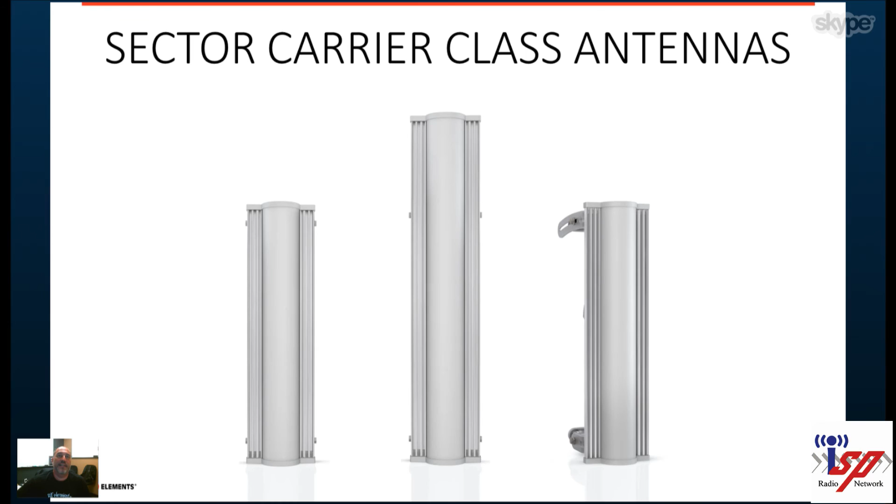So the first product line that I'd like to talk about is our sector carrier class antennas. This is a traditional type sector. It's been on the market close to 3 years, maybe a little bit more. And they're different than what's out there right now, and we'll go into the benefits. Sector carrier class antennas are designed for cluster deployments, where co-location is important, where you want to be able to isolate your co-located antennas.

They also provide excellent horizontal and vertical beam performance, and it's very lightweight aluminum construction. So from the tower climber's perspective, a lighter antenna is a better antenna, right?

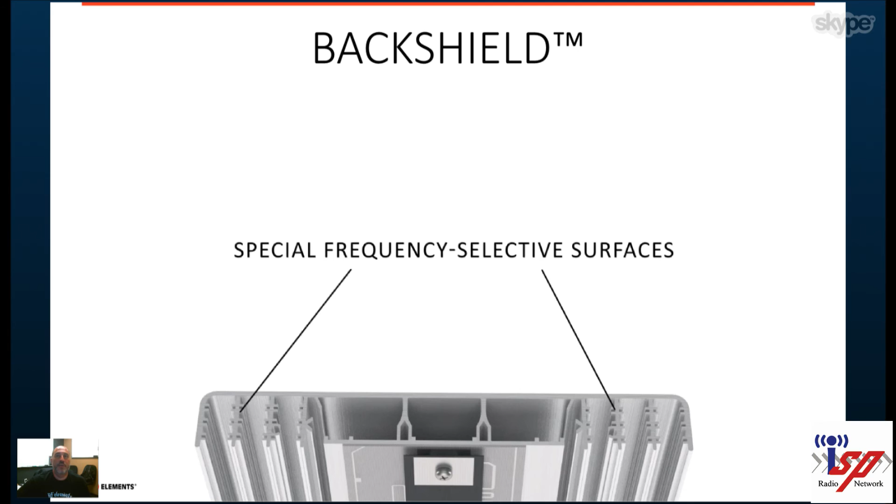Yep. So one of the first things that you notice about our antennas are the built-in back shields. The back shield is totally different than what most people are used to. A lot of people are buying aftermarket shielding kits and putting them on traditional antennas. Our back shields are more than just a piece of metal. They have special frequency selective surfaces, tuned specifically for this antenna and this frequency range, and they help not just the shielding for back radiation, but also the beam performance.

So our carrier class antennas have balanced vertical and horizontal beams. If you look at the animation on the left, that's our sector carrier class. You can see how the vertical and horizontal beam widths are practically identical. Mainstream sectors on the market usually have mismatched vertical and horizontal beams. So when you buy a 90 or 120 degree antenna on the market, typically only one of either the vertical or horizontal is close to that beam width.

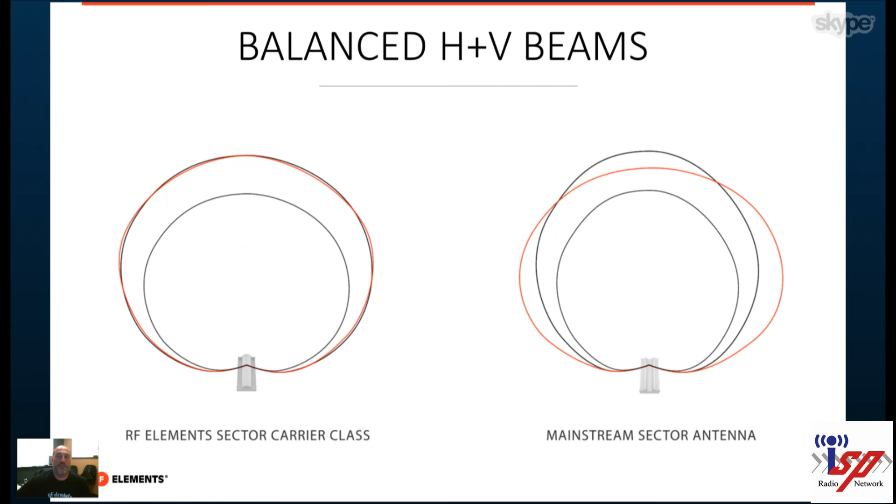Or the average of the two, horizontal and vertical together, come out to the 120 or 90 degree that is typically spec'd for antennas on the market, whereas our sector carrier class antennas have very good horizontal-vertical beam performance. We also have optimized beam widths, right?

So, we get the question all the time, why do you guys build a 100-degree antenna? Why aren't you doing a 120 or a 90 or a 60 or even a 45? And there's a simple reason for that. We built this antenna to be built to the highest quality, not only in construction, but performance. This antenna is a traditional type sector, which is a patch array sector, very common to a lot of the traditional antennas that are on the market today.

The difference is, in a patch array antenna, the beam pattern that comes out has a kind of natural beam width. It has a size that it wants to be naturally, right? And when you build or sell a 120, 90, 60, or 45 degree sector, you have to do stuff with shielding and reflectors to squish that beam pattern and make it 90 or 60. So at that point, it's kind of unnatural, and that's where you get these huge side lobes and these unbalanced beams. So we decided to break the trend in the market.

Why do I have to develop an antenna that's this cookie cutter fraction of 360, multiple of 90 type architecture geometry, right? We wanted to build an antenna that had a well-performing beam, whatever that may be. And 100 degrees seems to be it. It's 100 at -6, it's 75 at -3. And those frequency selective ribs that are on there help form the beam to make sure that the vertical and horizontal overlap. So we built it this way because that's the best way to give you the best performing antenna without trying to follow everybody else with these standard geometries in the market.

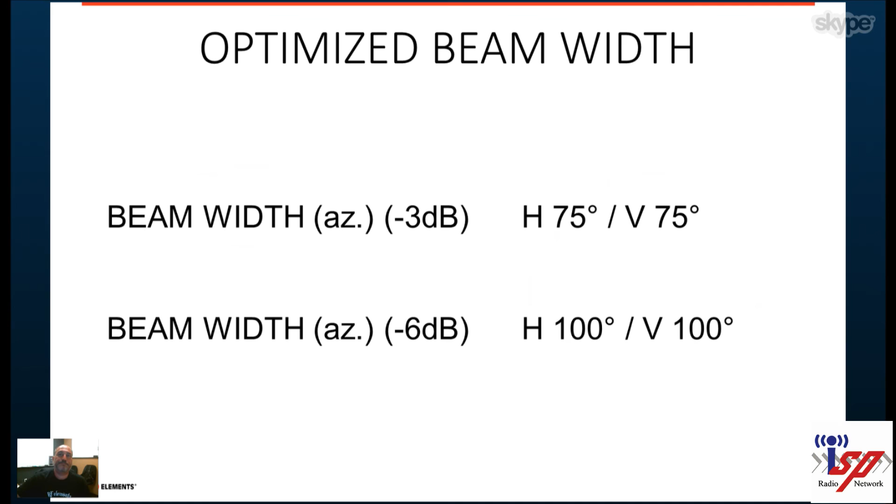So here's a competing antenna that's on the market, right? If we look at the vertical and horizontal beam pattern of the competing antenna on the left, this is a 45-degree AC sector that's on the market. You can see the RF simulation. You can see in horizontal, yes, the beam looks like it's 45 degrees, right? But what you also see is these huge side lobes.

I don't know if you can see my pointer on the screen, but you can see these huge side lobes coming off the right side, off the left, and you also see this leakage coming out the back of the antenna. Now, this may look like it's close to 45, but it's not even straight. It's not even coming out straight from the zero azimuth of the antenna. It's slightly cocked to the left.

If you look at the vertical beam pattern, you can see this is way more uniform, but it's nowhere near 45 degrees, right? And you still see in the vertical, there's a lot more leakage out of the back of the antenna. If you look at our carrier class antennas, you can see that the vertical and horizontal beams, again, they're not perfectly identical, but they're much better matched. So this is huge in MIMO performance, and you guys know this. You guys operate WISPs or have operated WISPs in the past.

You know that when you have a client install, as you start moving to the edge of that sector coverage area, you start getting huge mismatches in chain performance. Chain 0 to chain 1 receive signal is totally different, and this totally messes up the modulation rates of your radios and really brings down the overall performance of your antenna. So with our sector carrier class antennas, if you're in that main 100 degree angle, you're going to get good chain-to-chain performance, right?

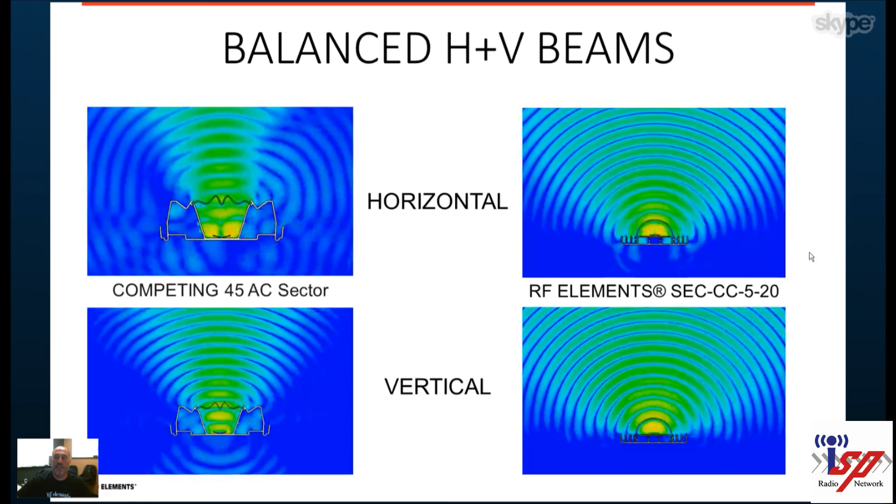We also have smaller side lobes, so it's a lot more difficult to connect customers outside of that 100 degrees. Our carrier class sectors do have side lobes like traditional antennas, but they're way more balanced, way more suppressed than traditional antennas on the market. The other thing that we get when we don't try and manipulate the natural beam angle of an antenna is very good vertical to horizontal gain performance.

This is the other thing. There's a lot of antennas out there that have these really high gain numbers, and that gain is usually at a specific frequency, and even in MIMO antennas at a specific polarity, right?

So you can see the horizontal here, the red lines in both horizontal and vertical are our 17 dB sector. So you can see across the spectrum that you're getting pretty well matched gain in both the vertical and horizontal. And then the black lines here, the vertical and horizontal for our 20 dB 5 gig sector. Again, you can see that the chain-to-chain performance of both those antennas in vertical and horizontal are pretty close matching.

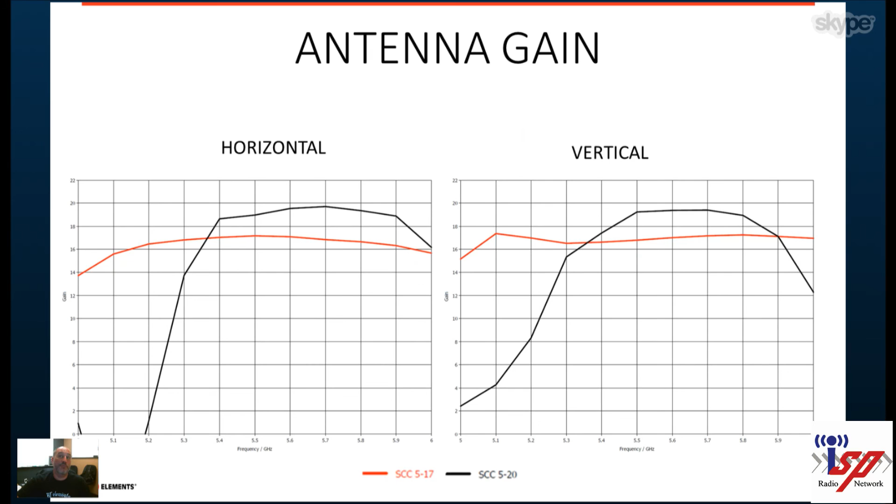So not only do you have gain that's uniform within the spectrum, also within the angle of that antenna, you have good performance. So a key portion there. The other benefit is the back shielding. Again, our back shield has been tuned specifically for this antenna, and it's made to do more than just balance the beams, but it's the shielding.

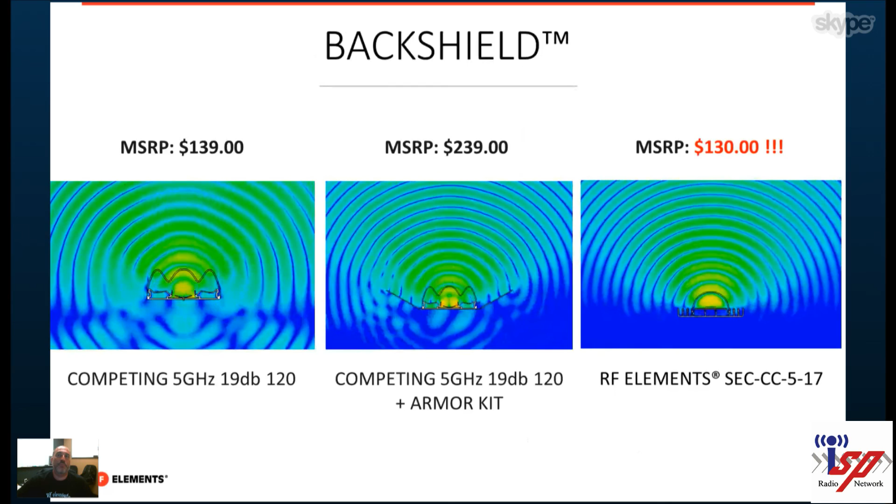In a lighter form factor, the wind loading goes down on our antenna versus another competing antenna with armor kits on there. So really, in all aspects, it scores very high in value and performance. Again, the antenna is very robust and durable. So even at that really good market price, you're getting a very high quality constructed antenna, right?

So there's a lot of manufacturers in Asia that are pumping a bunch of antennas out that are cheaply manufactured using low quality parts. We use very good UV resistant ABS plastics, extruded aluminum, stamped aluminum, again, stainless steel hardware. So we use very high quality parts in all our construction of all of our antennas. And we know that they survive really well.

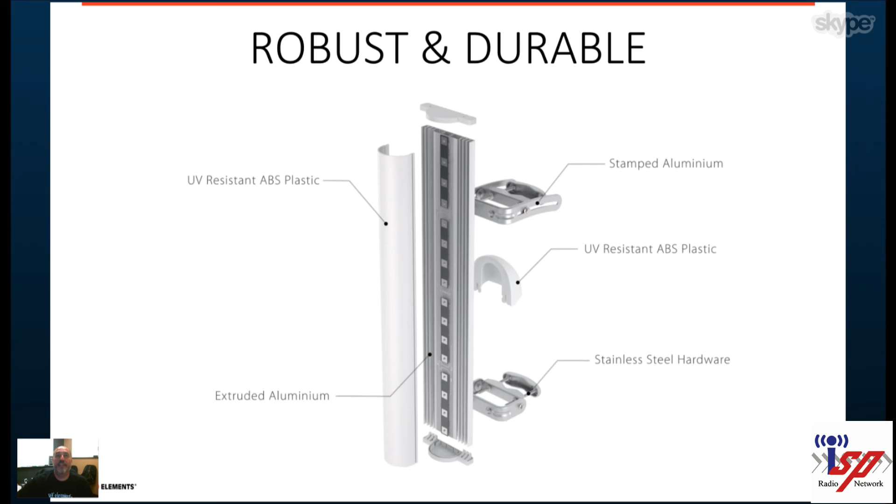Here is a picture from one of our customers that installed one of these carrier class antennas on the beach, right? So it was, I think, in Albania. It was out in the field for over 8 months in the sun and in the salt water. And if you look at the picture on the left, you can barely see which one is the used antenna. I believe the one on the left is the one that came from the field, and the one on the right is actually a brand new one. But you can see there's no oxidation, there's no rust.

Again, there's a lot of antennas out there that say they use aluminum, and they use a different material. They have some sprayed on galvanized spray or some coating and stuff that just never lasts. Our antennas do. The picture on the right, you can see the back of the antenna. There's just basically some dirt from the sand and soot, right? So you can see even the screws have survived. They're not rusting. Everything is high quality. 8 months at the beach would have destroyed, and destroys, most antennas on the market today.

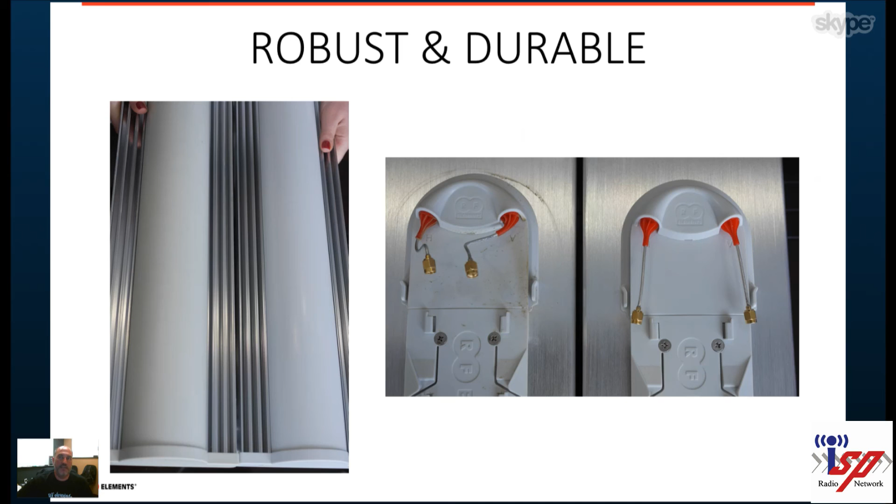Our carrier class antennas are compatible with a lot of different platforms. It's compatible with our Station Box S carrier class, a die-cast enclosure that you can put pretty much any MikroTik RouterBOARD inside that's of the same form factor as a 911, 411, or 711, the small square form factor. So you can put a 411 with a mini PCI radio, a 911, 912, 922, you name it. If it's that small square form factor, it fits in there.

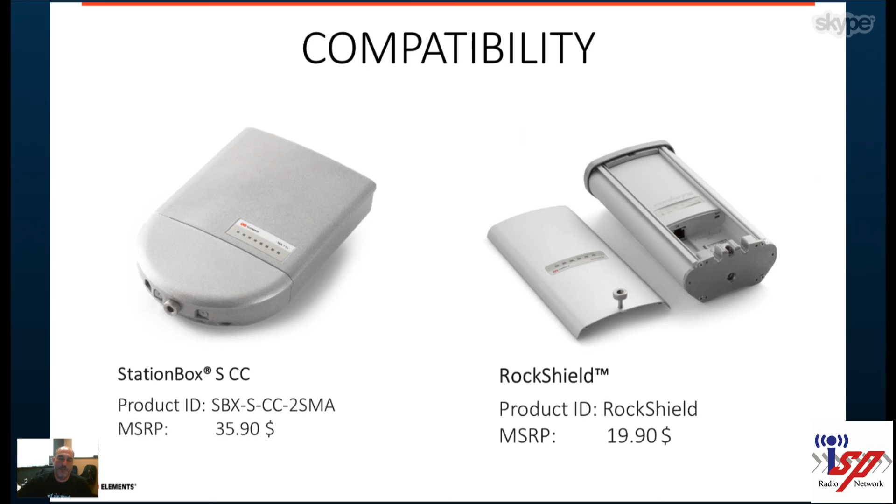It's also compatible with our Rock Shields, our aftermarket shielding kit for the Rocket M series - Rocket M2, Rocket M5, I believe the 365, and even the 900 Rocket fits in there as well. It's an aftermarket shielding kit that still allows you to clip on the back, and the cover covers the pigtails. As far as other connectorized radios on the market, the Ubiquiti Rocket AC Lite, the Rocket M series, Rocket Titanium, they all clip on the back and the shield covers it.

We also support the router board, the base box, net box, and net metal with the use of an Easy Bracket 912, which is a little plastic bracket. You screw it on the back, and then it clips and slips right onto the antenna, as well as the Cambium ePMP 1000 line. Again, the EPMP 1000 requires an Easy Bracket, a little low-cost plastic bracket you clip on the back that allows you to mount it to our sector carrier class antennas.

The antennas are available in many different models. We have a 14 dB 2.4 gigahertz version. In 5 gig, we have a 17 dB and a 20 dB. And we even have two 3x3 5 gig 16 dB antennas that work with net metals and 3x3. There aren't many radios out there that are 3x3, but the net metal is one of those radio systems that would work with our 3x3 antenna.

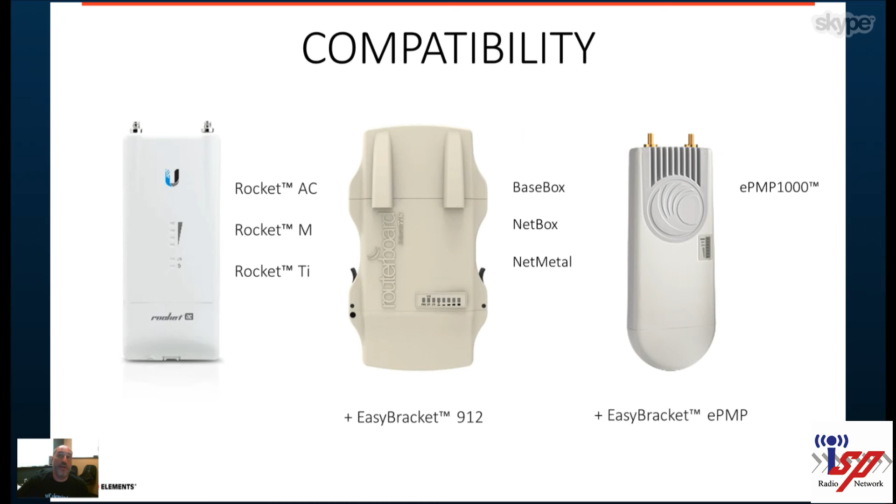And again, they're all price competitive on the market. So I know, no manufacturer comes on a show and says their products don't work, right? Buy our stuff even though it's crap, right? So our antennas do work, and I want to share some feedback from some of the customers in the field.

This was Scott Stace with Bluespan Wireless out in Arizona. He did a beta test site with our sector carrier class, and I wanted to share some of the information. He did a brand new build out of a brand new site. The initial test used 4 of our 5 gigahertz 17 dB carrier class antennas with the MikroTik NetMetal 5s. What they were looking for was basically better RF performance than they were seeing, improved ease of installation and shortened deployment time. They were looking for a lot of the physical characteristics our antenna has - by not having to add aftermarket shielding kits, they can reduce time because it's built in, right? Obviously it's quicker to deploy, quicker to get up there, lighter to use.

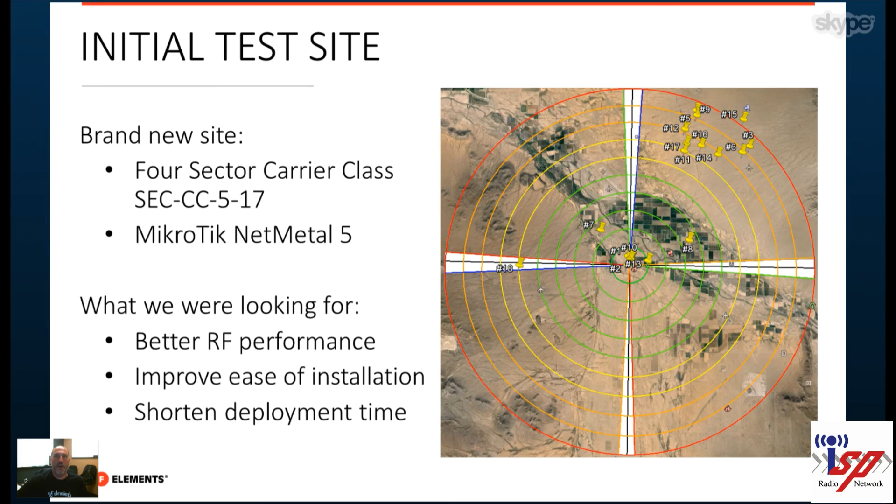So the result is he built out this site, and you see it there in the picture. When he compared the signal strength and CCQs of the CPEs from this site to other sites, he noticed a better overall signal strength and CCQ number. It's one of his best performing sites. He also noticed that the dead zones were significantly reduced compared to Ubiquiti sectors with shielding kits he was using - probably has something to do with the way the side lobes were allowing his customers to connect, and he was not connecting in main beam performance. Also, he had no worries about edge of sector performance - as you get closer to the edge, he was still getting good chain-to-chain performance, right? And he had a faster install and killer price performance.

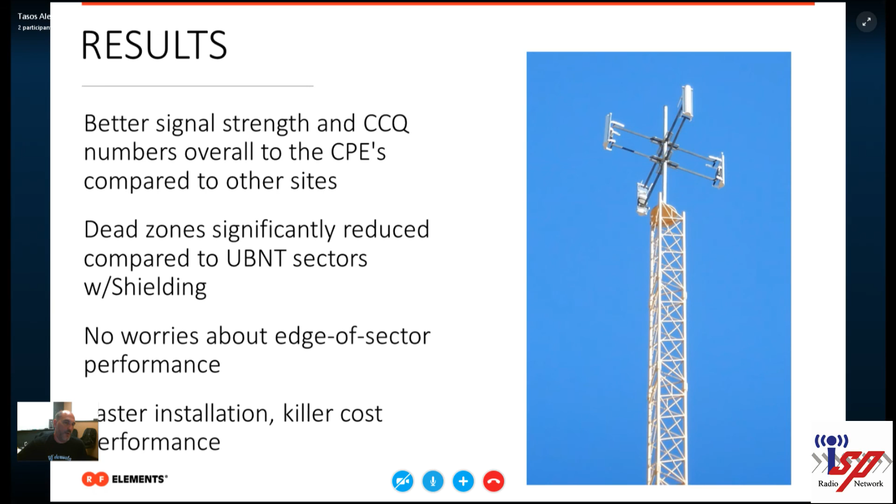Moving on from this site, he started deploying these sectors and only these sectors on his new sites, and retrofitting old ones as sites went bad with our antennas.

Again, here's another feedback from Chadwick's with AU Wireless - I believe he's in Colorado. He used our antennas with Cambium ePMP radios, and his signal strength improved about 10 dB in SNR, right? He was going from negative 65 to negative 55, and speeds were increased over 25 meg. So he was doing much better. His radios perform much better with our antennas than the Cambium antennas, which look extremely similar but perform totally different than our antennas.

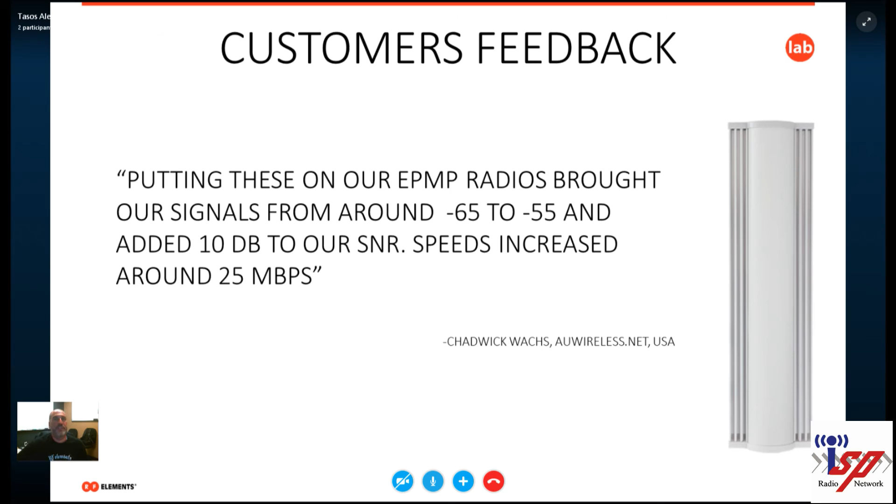I know you guys get questions. If you have any questions, maybe we can address them now, or I can continue into our symmetrical horn antennas or symmetrical sectors. So any questions, Dennis? Let's take a look here. It looks like one person asked - I'm just going to read this verbatim - are your antenna ratings using 3 dB or 6 dB?

Yeah, exactly. So we post both, right? Just look at our spec sheet. The only reason we show -6 is because another manufacturer kind of created the new standard of -6, so everybody's showing -6 in the field. So you can see both -6 and -3, and I believe it was in the slide I had previous. Our spec sheets show both -6 and -3. Can you explain to everybody what that actually means on the antennas?

Yeah, I wish I had something to show, but basically as the antenna radiates out, there are angles at which the antenna comes in. So you have drop-offs of gain at -3 dB, -6, -9, right? It goes down the angle of the antenna and how it radiates. At -6 dB edge, we're 100 degrees wide, and at -3, we're 75 degrees wide. So you can effectively use this antenna as a 75-degree sector if you wanted, if you base all your calculations off of the -3 dB spec.

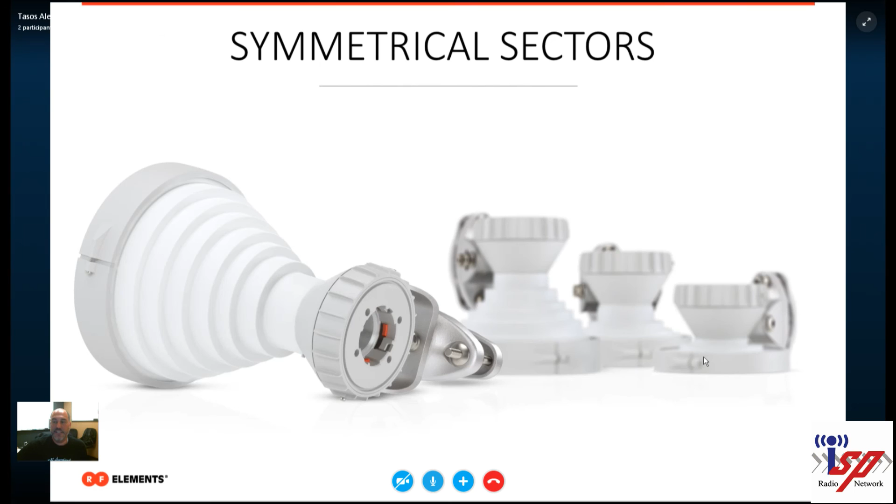So moving forward, we go to our symmetrical sectors, or the horn antennas that people have seen, and this is really where the game-changing stuff starts. Although I think what we've done with traditional sectors is pretty impressive as well. Is the presentation back up? Yes sir, okay great. So these are our symmetrical horn antennas. A lot of people may have seen these at shows before. So we'll start talking about what makes them unique.

So the first question we always get is, well, what's a symmetrical sector? It's pretty simple - we talked about the beam angles of traditional antennas, right? Our sector is 100 degrees wide in azimuth, and traditional sectors on the market are 120, 90, what have you, but they typically have a really small vertical beam - usually anywhere from 6 to 8 or 9 degrees tall. So this is a pretty flat pattern, as you can see on the left - really wide but really narrow.

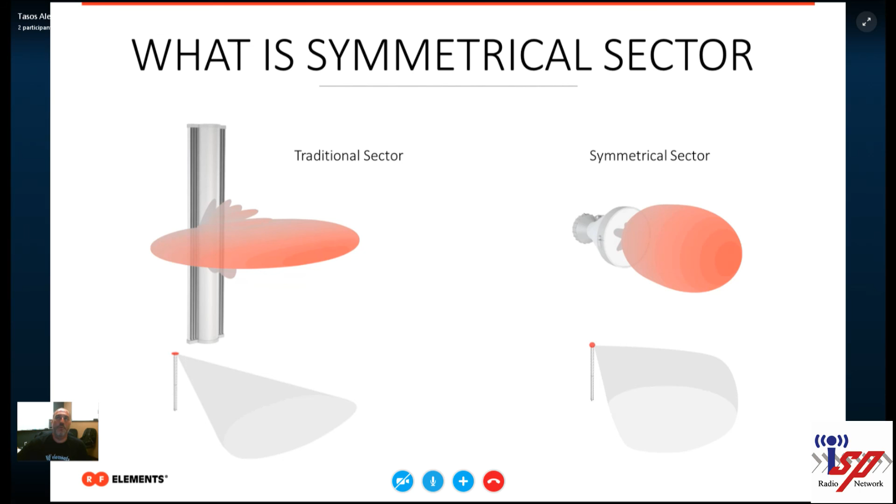A symmetrical sector is just that - it's symmetrical, right? So if you have a 30-degree wide symmetrical sector, it's also 30 degrees tall, and there's a lot of benefits to that, which we'll talk about. The main thing is its unique beam - you can see the azimuth cut is identical to the elevation cut. Again, this is our 30-degree antenna, so you can see it's 30 degrees wide as well as 30 degrees tall. The other thing is there's no side lobes.

This is the hugest thing, and we'll talk about that a little bit later. So not only is it symmetrical, it has no side lobes. So if you connect a customer to an AP using one of these horn antennas, you know that you're always in main beam connectivity. And I can't stress how important that is.

There's a lot of customers out there connecting on side lobes. We got a lot of early feedback from these antennas, and a lot of people complained because when they went outside of the 30, 50, 70, whatever it is, beam angle, the signal dropped off, and they were mad because there was no side lobe. I'm like, that's the idea. We need to get rid of side lobes. The best side lobe is no side lobe, right?

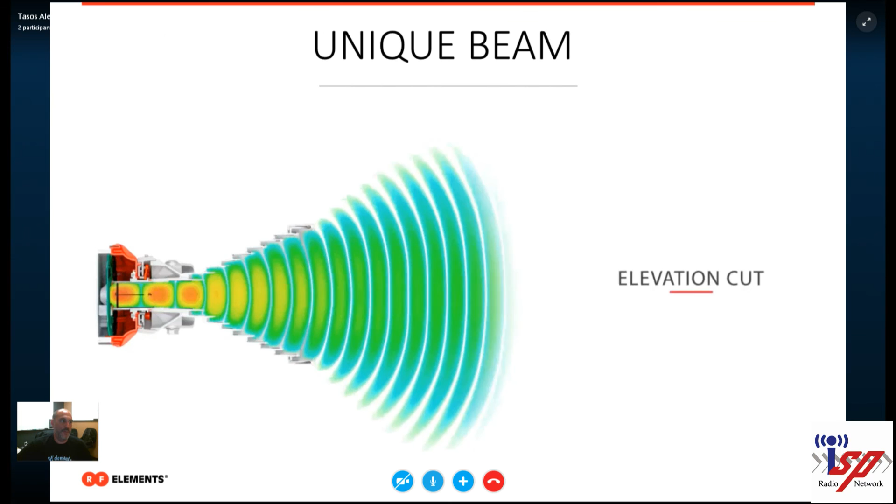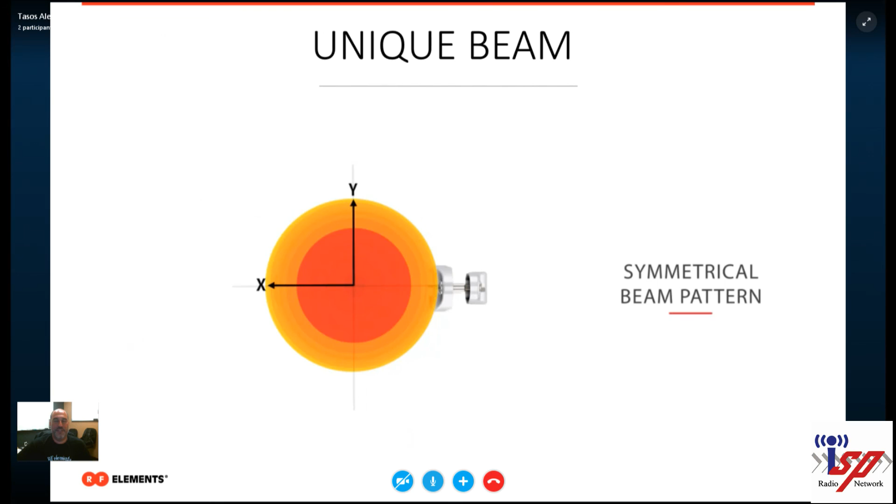And another, yeah, our unique beam patterns are identical. We went through and did beta sites, and I can't tell you how many customers we found connected to the back of a sector, right? Because that was stronger than the side of the one that they're supposed to be connecting to. I mean, it's really eye-opening as to what's happening, and these symmetrical horn antennas are just phenomenal, and they do exactly what we say. A lot of people complaining, but they definitely do what we say it's going to do.

So if we look at the beam pattern comparison here, there's a bunch of things that happen. Traditional sector on the left, you can see it has huge side lobes, in the top and the bottom. Something that happens in a traditional sector is as you change frequency, the beam pattern changes. So you can see as we go higher in frequency, it now goes from 120 down to 100 degrees. So it's only 120 degrees at the lower frequency, or it could be vice versa. The main concept here is as you change channels, your beam pattern changes.

So you deploy a sector, you deploy a tower, you get a customer signed up, everything is great, he's towards the edge or whatever it is, but everything's performing well. All of a sudden you have noise. What do you do? You change channels. Boom, all of a sudden you're like, how come this customer that was close to the tower now has crappy signal? Because the side lobe shrunk and now he's not getting the signal intensity.

He's on a side lobe, or he's on the edge of the sector performance, which has now become narrower. Our beam performance in symmetrical horn antennas, as we change frequency, you can see that the main beam here doesn't really change shape much. So not only can you guarantee that's the same case even when you change frequencies, changing channels doesn't affect the performance of your overall AP.

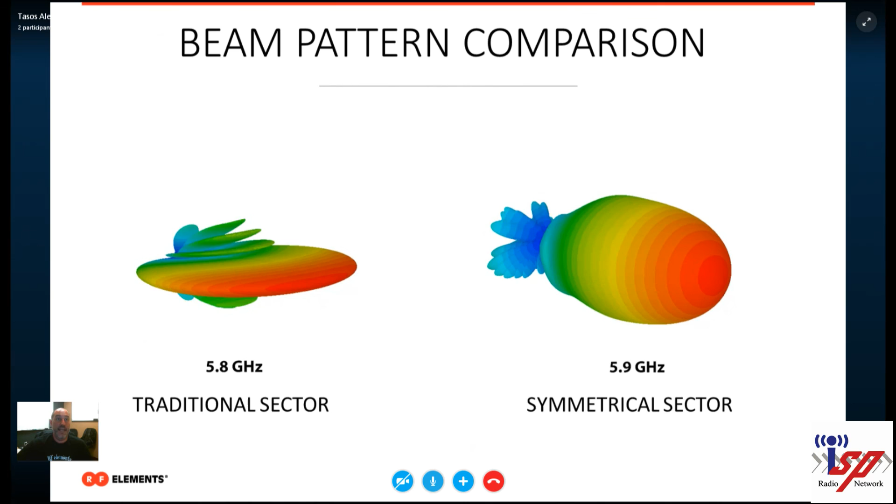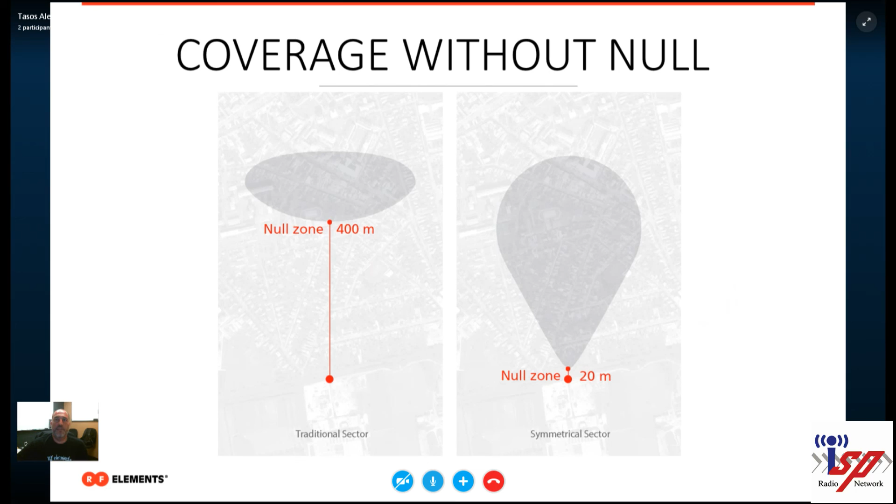Another benefit is coverage without null zone or dead zone. We know traditional sectors are notorious for this. You're covering a big area. They work great in flat areas, but if you're really high up on a tower, you get a huge dead zone underneath. Again, you're connecting into a side lobe of the antenna, but we can show the kind of relationship ratio between a symmetrical sector and a traditional sector. Our symmetrical horn antennas still have a null or dead zone, but it's very small in comparison. And in most cases, you need zero down tilt at all in order to cover a whole area. So this is another unique benefit of a symmetrical horn antenna.

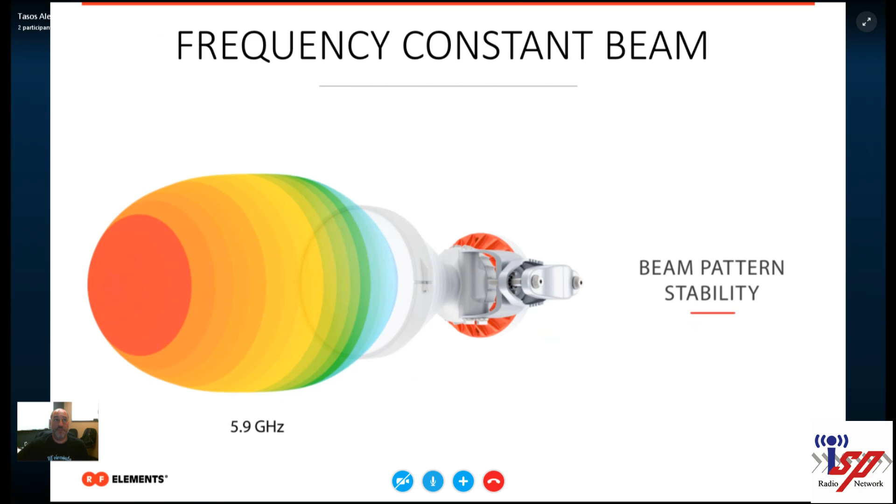Again, frequency constant beam and a very stable beam pattern. As you change channels, you can see here that the beam pattern doesn't change much at all. So it's very uniform. Another benefit to the antennas.

Balanced gain. This is probably another huge thing. Not only do you guarantee if you're in main beam connectivity that you get the same performance, if you change channels as well, the gain doesn't change as much at all. If we look at the horizontal and vertical, it's pretty much identical. If you overlap them, they literally are right on top of each other.

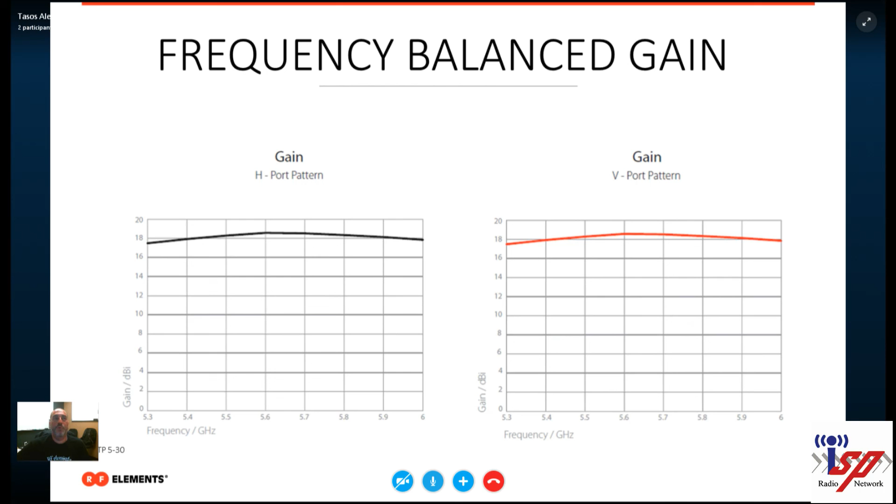So you will not see better chain-to-chain performance on any other sector on the market than one of our symmetrical horn antennas within the coverage area. You may see it on a competing sector on the market, a traditional sector, if you're within 20 or 30 degrees of that azimuth, but it really starts to drop off as you get to the edges of that 120 or 90 degrees that they spec it at. So really good gain performance in both polarities. And this is the gain performance for our 30-degree sector. Again, no side lobes.

You saw this earlier with our carrier class antennas, how we suppress side lobes a little bit, but you can see with our horn antennas there are zero side lobes. So you can see compared to a traditional sector, again, very clean, 30 degrees, no side lobes, and practically zero.

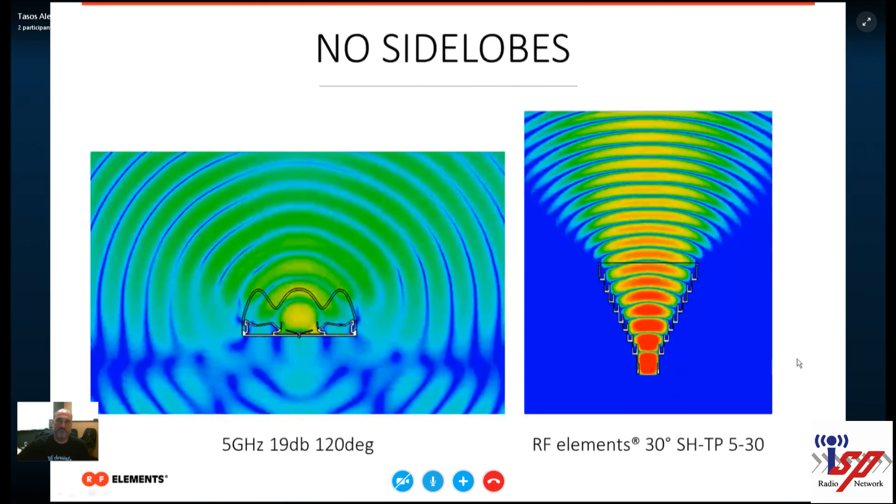I mean, there is some leakage out the back, right? But the magnitude of that signal is so small that it's invisible to your radios, right? It's so small it's hard to even measure it. You would see probably something coming out the back, but it's indiscriminable from your radio. It's hard for it to even see it.

Here again is another comparison to that 45-degree sector. Again, we compare this one because it's closer to the 30 degrees. So again, you can see ours is straight out, uniform gain throughout the main beam, no side lobes, no back radiation. The horn antennas are truly the wave of the future,

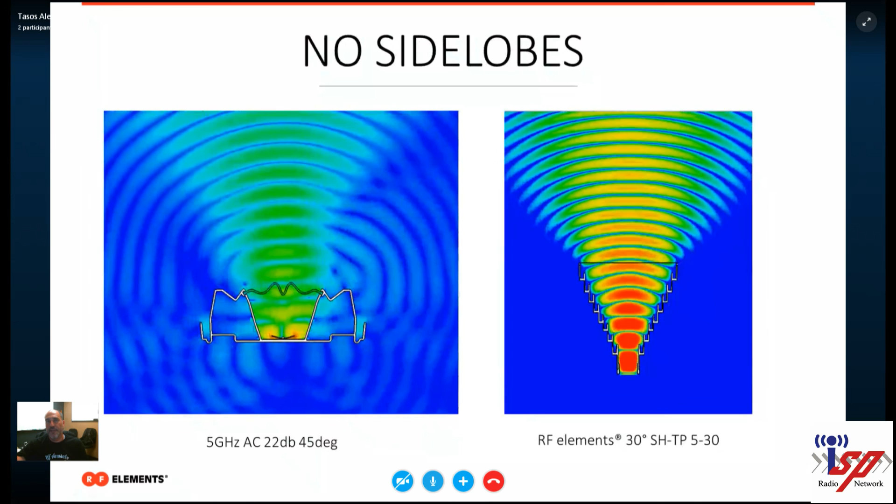and for more reasons than just its unique beam and standard performance, but it's a tool that enables you to do so much more, and we'll get into that a little bit here. So the scalability of these antennas is phenomenal, right? So you're not stuck again with the standard geometries that people have been building towers with forever, right? 90s, 120s, or something to that effect.

So you can actually now send signal to where you need it and not go beyond that area, because you have to remember, once the signal passes your coverage area and it becomes unusable for you, it instantly becomes noise for other antennas, and it doesn't stop, it keeps going.

So really we're trying to change the mindset of WISPs, right? And it's difficult because we've been pushing more and more gain forever. So when they see these low gain numbers, or what they perceive as low gain, it's an instant turnoff. And if you use the antennas in the right way, then it's not, right?

So, you may need to cover a 90-degree area in a larger distance than the single 90-degree antenna offers, right? So you can use three 30s because you can co-locate them to make a 90-degree coverage area. So basically you can mix and match and use these antennas to build the coverage you need. It's not about a single antenna or a single SKU.

It's using these antennas together as a complete system to really design the coverage you need. You need more distance, you could use the tighter beam angles clustered together to give you the distances that you need. If a bunch of your customers are close in to the tower, why send the signal 10 miles out when you only need to propagate it 3 or 4, or less?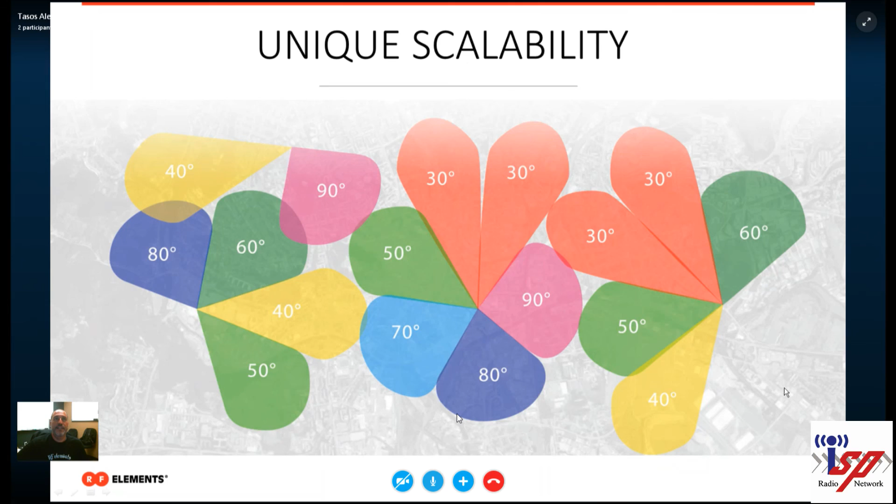Okay, so let's go here to, is the slide still up? Yes, sir. Okay, cool. So let's talk about compact size. You can see these things are lightweight and small. So you can mount three to four, depending on the beam width antenna, on a single mast where you would put a traditional sector. So in the space of a single traditional sector, you can have three times the customer load.

We get people all the time asking how many customers can I put on an AP? Well, it's not really related to the antenna, it's more related to the radio platform. We know the average is very wide, anywhere from 20 to maybe 50 customers, depending on the bandwidth packages that you're delivering and connection rates.

Depends how you run your sector. If you're running huge point to multi-points, then you have customers that are marginal signal and customers that have good signal. So it's a very, very diverse way of answering it. But again, you have a single antenna with a single radio when you're using traditional. So we can take a 90 degree, turn it into 3 30s, and you get 3 times the customer density in the same mounting location as a single one.

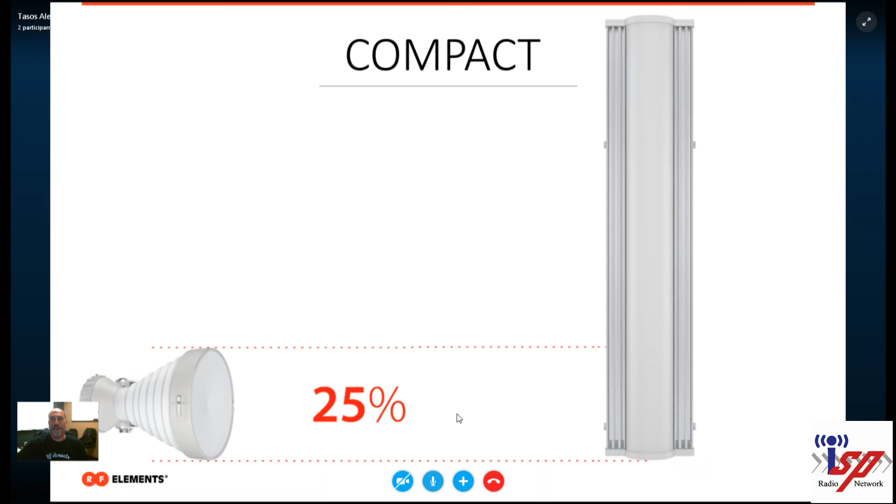It's plain and simple. Wind loading for 3 of these antennas is way less than 3 sectors, and probably a little less than a single sector as well. So again, robust and durable. Everything about our products, the price is very competitive, we feel, to other products on the market, and they're made of high quality parts. Anybody who's seen these can attest to that. Anybody who hasn't seen it, I assure you, you're not going to buy one of these things and say, man, this thing is poorly or cheaply made.

We thought about a lot of things. It took us about 2 to 2.5 years to develop these symmetrical horn antennas. And it's not because we wanted to just create a unique antenna from the RF standpoint, but we wanted to look at it from the bottom up. We wanted to start from the ground and work to the sky, right? So it's built well. It has the best RF performance. We looked at the user experience of the installer, right? It's lightweight, so it can be carried up. Most of these things can be installed with one hand.

All our symmetrical horn antennas have our patent-pending twist lock ports on there, right? So radios can be installed really easy, makes maintenance easy. I mean, just everything about this antenna is easy. It should ease your mind. This is the type of thing where you install a radio on this antenna and you just forget about it. Most of the customers that are out there using these antennas are forgetting that they had customers on their network because they just don't get the phone calls.

And again, I'm not trying to overmarket this and say that it's perfect in every scenario. Obviously, there have been some potential misunderstandings about how these antennas work. Part of that was our fault kind of in the earlier days, but for the most part, you install these antennas, they work just as good or better. We're seeing better performance in AC than N because AC is more susceptible to noise, and these things do a great job at reducing noise. So overall, we try to look at every aspect of this antenna, not just its RF performance, but even its user experience and maintenance. So very, very well built.

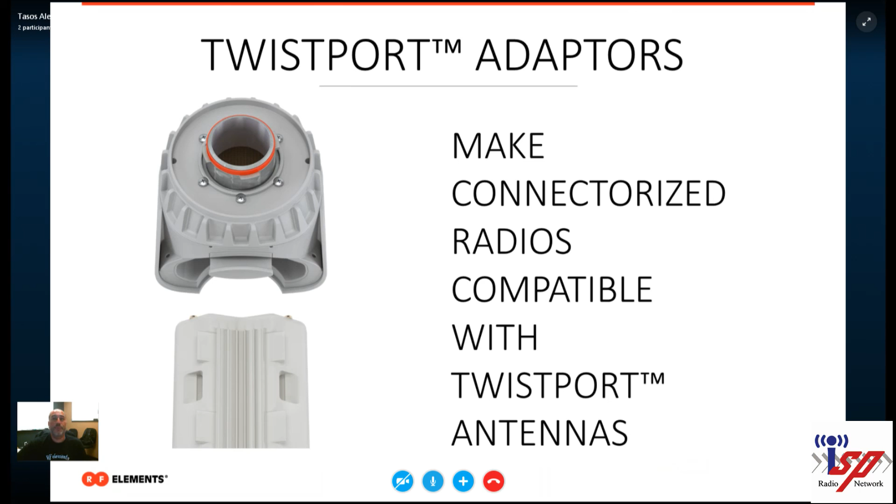We realize that there are a lot of small form factor connectorized radios on the market from Ubiquiti, Cambium, and MikroTik. So we created these TWISTPORT adapters that allow you to use these radios with our antennas, to bring these radios into our TWISTPORT ecosystem now and into the future. So basically, the adapter makes a current connectorized radio compatible with our TWISTPORT antennas, and it's quite easy. You just take it, you slide it in, it clicks in place, and then you twist it on the antenna, and it's done. It's really simple.

Now, what this does is a few things. We can actually increase the performance of radios, not only with the noise filtering of a horn antenna, but these TWISTPORT adapters actually help. If you look at a traditional radio setup, you usually have some pigtail apparatus that connects your radio and interfaces it into the antenna. And we have kind of low quality pigtails, some with right angle connectors on there. So we have a few things.

Not only can you expect to see from 1 to maybe 3 dB of loss just because of that connection interface, it's also the #1 failure mode for most outdoor wireless networks: water ingress. You guys know that. With our TWISTPORT adapters, with these other vendors' radios, you've reduced loss. So you can see anywhere from maybe half a dB, I don't want to say max, but no more than 1.

Definitely 1 dB or less. There are pigtails inside there, but they're semi-rigid. They're extremely high quality. They're tuned. They're not being twisted in a circle to get it tucked up under the shield. Really, everything about these TWISTPORT adapters, the way they've been designed, helps increase performance even. So you'll get more in your link budget because there's less signal loss through the pigtail apparatus.

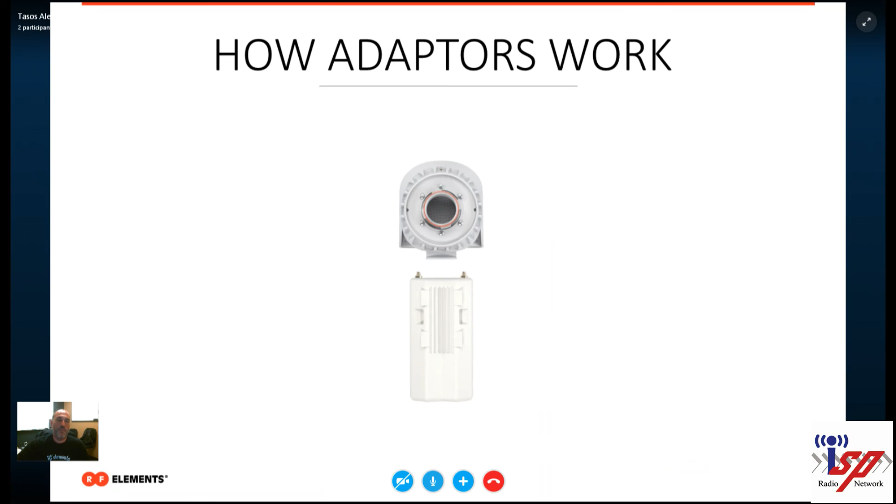You'll get fewer failures because of water ingress. You don't have to tape. You don't have to have any tools, no wrenches. Really, it makes it really, really easy. Again, we talk about cross-platform compatibility, right? So currently we have TWISTPORT adapters for many, many radio systems out there.

Ubiquiti Rocket radios, so we cover the PTP and PTMP Rocket ACs, the Rocket 5 AC Lite, the Rocket M5. Again, the whole gamut of Ubiquiti 5 gig radios. Cambium ePMP 1000 series, both the connectorized regular ePMP 1000. I think there's a Lite AP, the synced AP. They all work. One TWISTPORT adapter works for both of those. And then for

MikroTik RouterBOARDs, right? So again, on the right-hand side, we see these two adapters allow you to easily take a RouterBOARD 911, 411, 711 type, or 74 or 9 series board inside here, and makes it now TWISTPORT compatible with our TWISTPORT ecosystem, whether it's the horn antennas or our parabolic UltraDish 380 series.

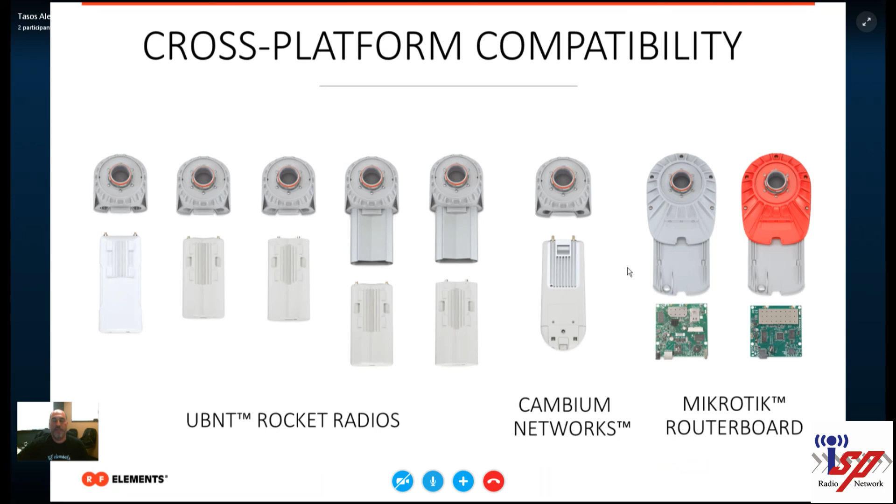So again, for point-to-point and point-to-multipoint, and maybe we can say high-end CPEs, depending on how you value price of the device as far as quality goes. Definitely high-end CPEs you're capable of, right? Another thing, something people have been asking about a lot: the Rocket 5 AC Prism with GPS. This has been released by the company, it's been put out on social media and stuff.

This is the TWISTPORT adapter. This is what the Rocket 5 AC Prism TWISTPORT adapter looks like. It should start shipping next week. For the U.S. specifically, we're air freighting them in, so distributors should have them in the next week or two. So we now support the Rocket 5 AC Prism in a TWISTPORT type device.

So if you want to use it for point-to-point or point-to-multipoint with our horn antennas or UltraDish, it's compatible. That's the whole idea behind the TWISTPORT ecosystem, making these radios compatible with all the antennas we come out with in the future as well. Quick question on the TWISTPORT. So in this picture, I would stick my Rocket 5 AC and it just goes up there. Do I have to screw anything, or is it just made up to the?

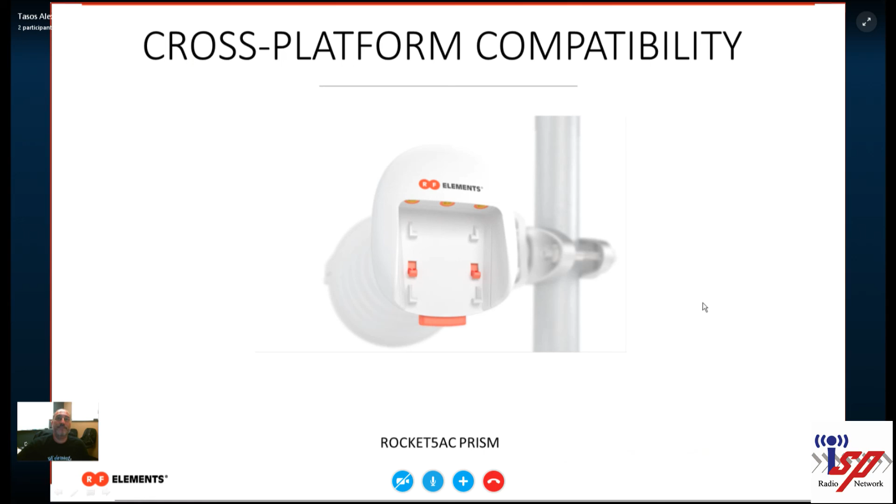Cool. So the last part for cross-platform compatibility is the newest symmetrical horn carrier class antennas. This is basically the symmetrical horn antennas we showed without the TWISTPORT on them. So now we have a SKU that has N connectors on there. These allow you to connect a different class of radio. These are great for Mimosa B5Cs with the point-to-multipoint firmware.

We're envisioning the A5C 4x4, so two of these in conjunction, one on top of the other, to give you a 4x4. Also PMP 450, Cisco radios, Netmetals and NetBoxes. Those are slightly too heavy and too large to make a TWISTPORT adapter for. So now we have an antenna line that gives you connectors to also interface those larger form factor radios that aren't suited for a TWISTPORT type adapter into the ecosystem, so to speak.

So we did. Okay, sorry? Yeah, we did have a question since you kind of mentioned it here. One of the questions online is, are you guys going to plan or develop any 4x4 or 8x8 beamforming antennas specifically for products like the Mimosa A5C?

Yeah. So I can't share the total roadmap, but man, we have a lot of new and exciting products coming down the pipe, right? So we're going to have some pretty good announcements at WISPAPalooza this year in Vegas for some new products that are coming out.

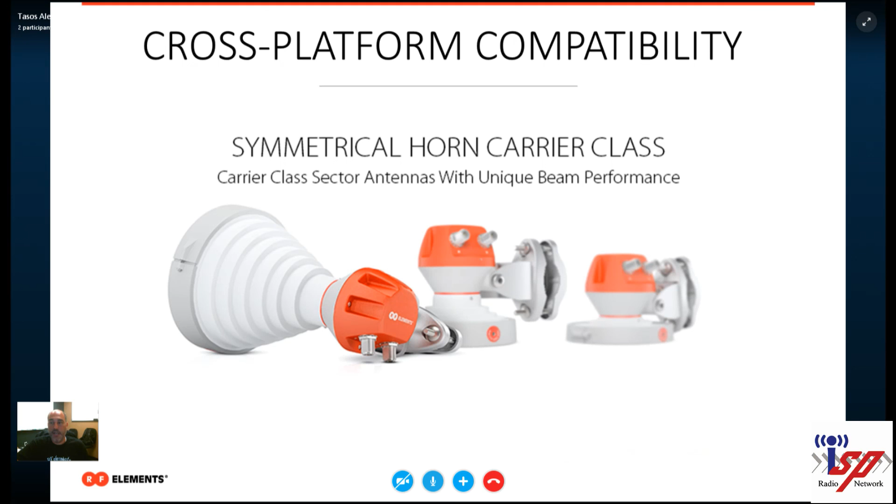But yeah, we're looking at everything from higher density MIMO antennas, 4x4 and beyond. We're also looking at different frequency ranges, right? We know the LTE market is growing, so 2.5, 3.5, 3.6, that whole regime of frequencies is definitely something we're looking at. It's on the roadmap, so stay tuned. Yeah, I think the short answer is yes. Yeah, the short answer is yes, right?

Again, at RF Elements we're really conscious about our customers. We really want to provide good service and good product, and be different in every way to the customer base out there, right? We're trying to go beyond not only in the products, but how we deliver and announce products. We know there's a huge history of, hey, look at this new product coming out next month, and 12 months later it's still not ready. So we're trying to break that mold as well.

So thank you. Yeah. So again, look, the manufacturing process, and I'm really not bashing any of the other manufacturers, because manufacturing products is tough, man. You have a design that's great, you go through manufacturing, something doesn't happen right, so you have to tweak molds, redesign, retune, and go through it again. So having zero delays is never going to happen.

But I believe in the industry, as a manufacturer, we can greatly reduce that by not opening our mouths too early, by not promising delivery of product way ahead of what's physically capable just to create a buzz. So I'm trying not to talk too much about the future. I'll only say we have a lot of stuff coming down the pipe, so stay tuned, and we'll definitely have some stuff to address a lot of the questions we're getting about antenna technology. Excellent. Let's see if we can wrap it up.

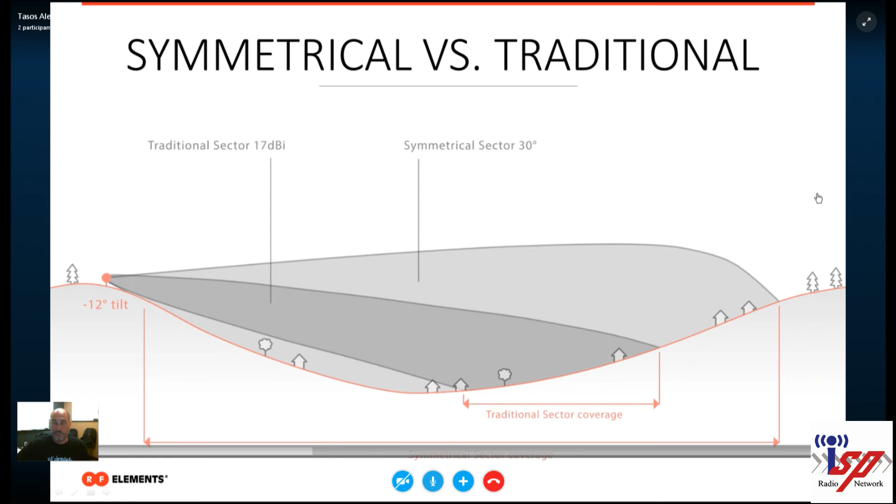What's moderate distance? I'm getting there. Next slide. So moderate distance, right? Got it. Oh, beautiful. You're awesome. Yeah, so this is the question we always get. We're finding that these antennas actually go further and further, but it really depends on what you use as a client.

We always get that question - what's the distance of this antenna? Hard to say. It depends on what radio you're using, what kind of CPEs, and what the noise environment is like.

So if we classify these antennas based on range, looking at an average 21 dB gain CPE - like a NanoBridge 21 or a PowerBeam 300 - roughly in that 21 dB range, a 90-degree sector can get you about 2.5 to 3 miles. Our 30-degree symmetrical antenna with 18 dB of gain gets roughly 6.6 miles.

We have customers using 30 dB dish antennas with Rockets from Ubiquiti doing 15 to 16 miles on a 30 or even 60-degree antenna. Our 60 is spec'd at 3.7 miles, and we have a customer doing over 14 miles, again with a 30 dB dish antenna and rocket.

So obviously you have power on the side to make up the link budget. You can see a traditional sector goes a lot further based on the same CPE, because it's focusing more of its gain forward and it's squashed. So if we go to the smaller microcell, these antennas are definitely the way to go.

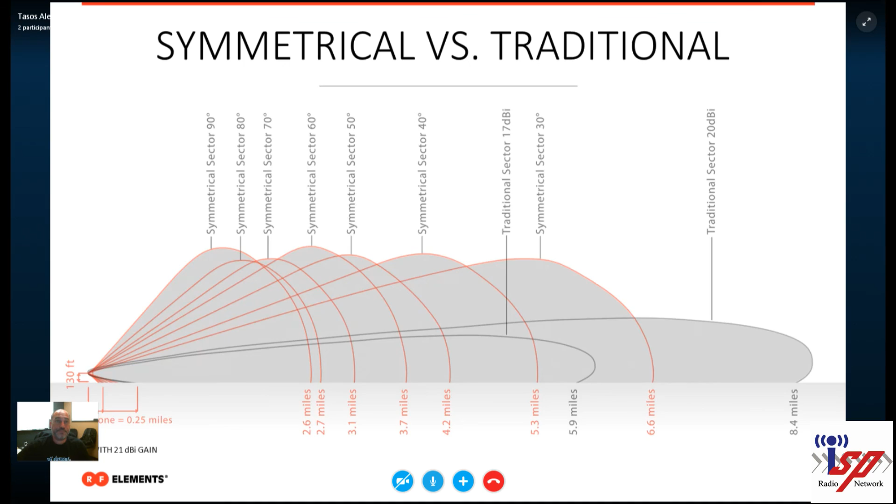Okay, quick case study - this is from Rick Hughes at SOS Communications. He did one of the first deployments with horn antennas here in Texas. He had his primary hub on a water tower.

He had the same frequency issues everybody has, sharing space with competing WISPs. He had very low performance because he had only 4 APs with 185 customers, so he had no room to expand his customer base or upsell service. We know upselling is a huge thing in this industry - you want to give them more bandwidth and charge more money, but you can't do that with limited capacity.

So what he did was add 3 30-degree sectors covering a 90-degree area. He was able to add another 100 customers to this site with no interference issues. These 3 were actually overlapping with the 90-degree sector that's here.

He was able to keep his regular 90-degree sector covering the low-cost customers that aren't getting high data packages, and migrate customers that he had on that 90 onto these sectors, and also upgrade service. So he was able to add new customers and upgrade customers that wanted to be upgraded by offloading them to these antennas. It's another way of looking at your business, upselling packages and adding customers in a really small form factor.

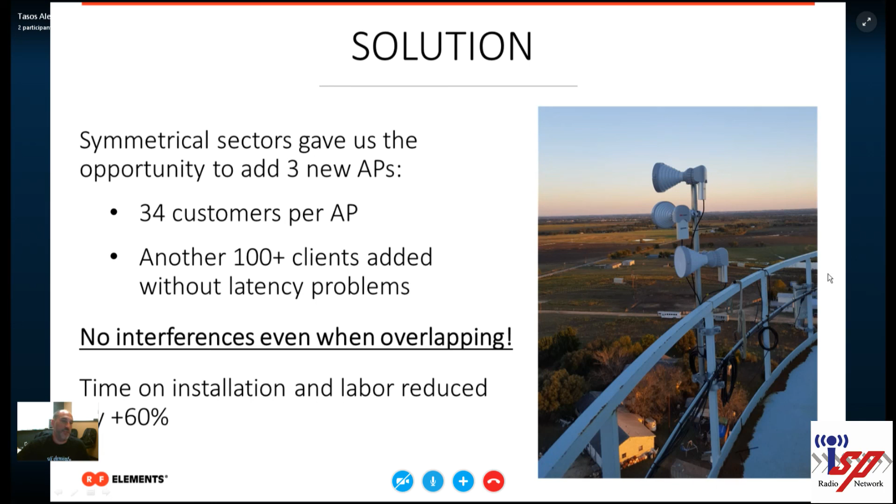He saved 2 channels here basically by going to 20 megahertz channels on all his radios as well. So overall, it helps everything from spectrum efficiency to signal quality and so on.

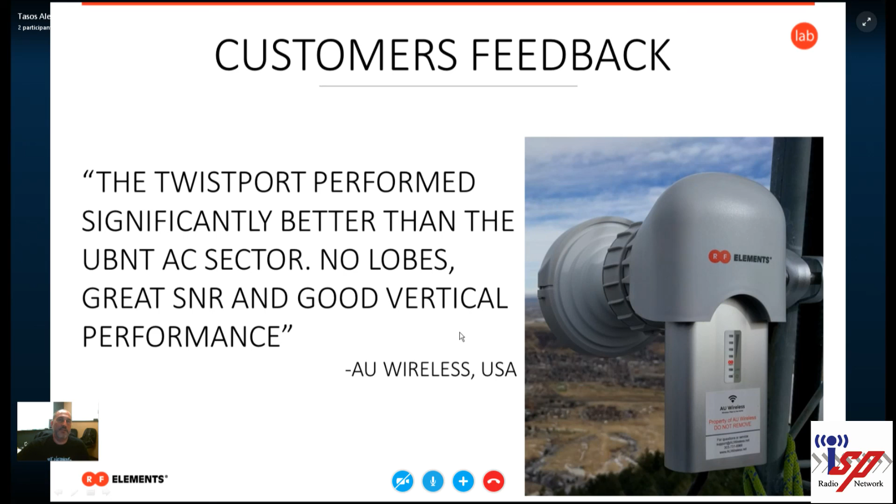Just a few other little items here. Here's another customer, AU Wireless. This customer also tried our horn antennas. He was on a 3,000-foot mountain side, and down in the valley he was having a hard time with traditional sector and down tilt. He was able to put up one horn and got significantly better performance with no side lobes, good SNR, and good vertical performance. So he could get all his customers main beam connectivity with very little down tilt, and he didn't have to sacrifice some customers.

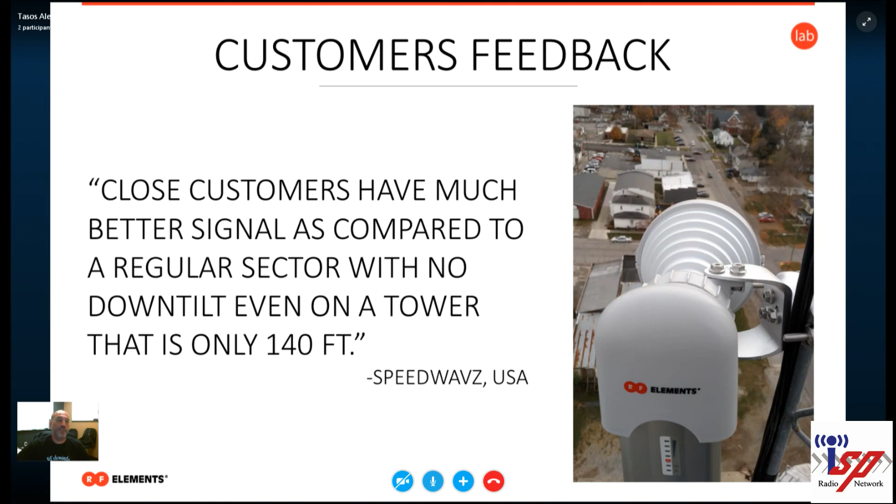Another customer had a problem with clients close into the tower. This one was only 140 feet in the air, but at that height you have a pretty good dead zone underneath a traditional sector, and you're going to be on a side lobe. With the horn antenna, he didn't have that problem at all.

This is a great one, from a customer in Alaska. This shows you the co-location ability of these horn antennas. He was able to mount 7 of the AC PTMP radios from Ubiquiti, no GPS, but he's able to co-locate 7 of these 30-degree horn antennas on that small portion of the tower. If he had to put 7 traditional sectors, he couldn't — he'd have to expand the tower up more and start guying it, and you don't even want to talk about what would happen there. But you can clearly see this site is working really well, and they're clustered like they're supposed to do. We can only imagine what the Prism adapters with GPS are going to do — it's going to be quite cool.

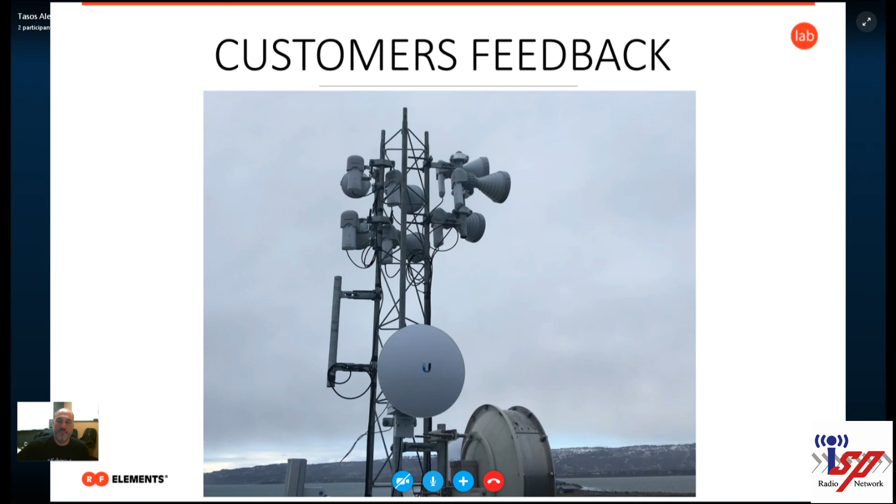So are we good on time? Can we keep going here? Just a few more slides?

Please do, sure, okay. So we want to talk about the outdoor wireless paradigm — this is where we see radio systems going in the future. Currently there's three parts to a radio system: you have the radio, the pigtail interface, and the antenna. This is a traditional radio system on the market.

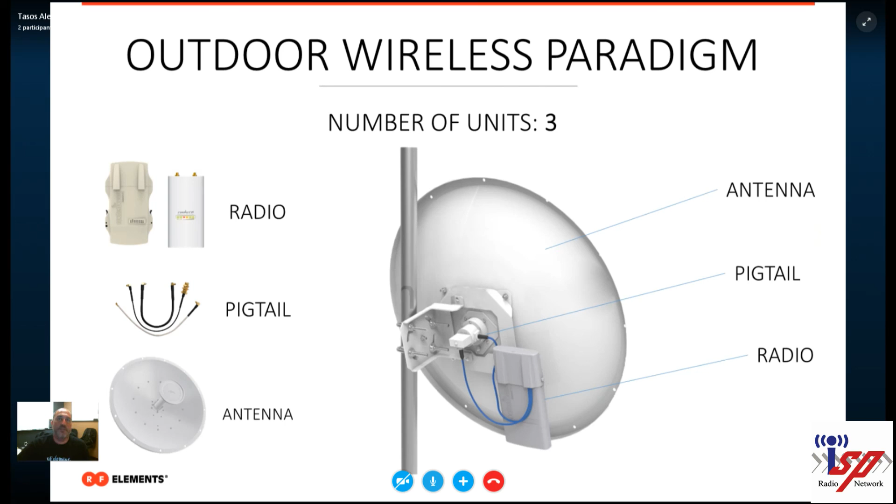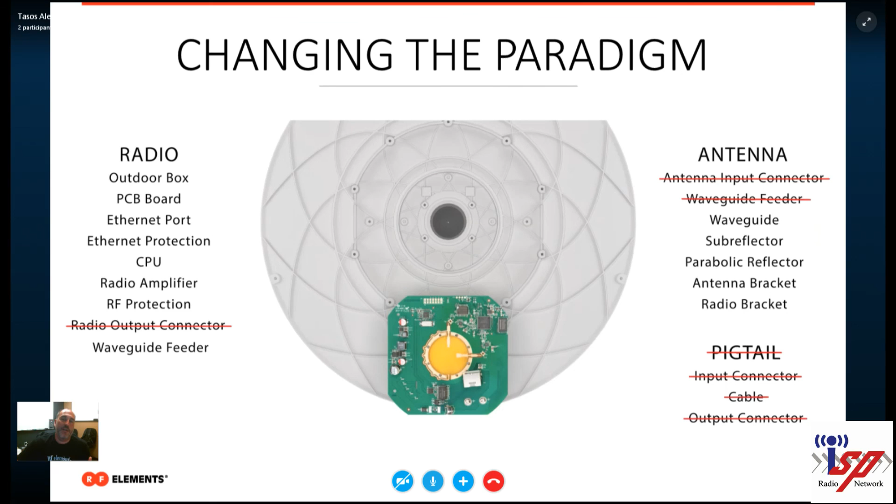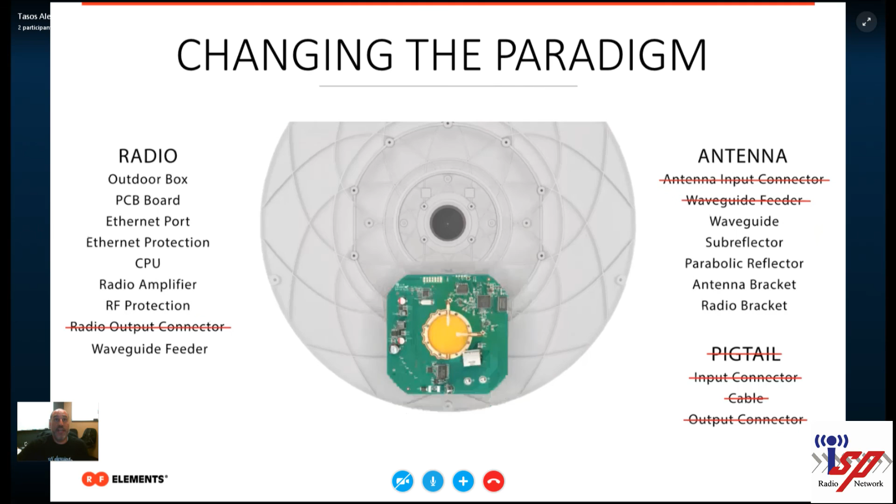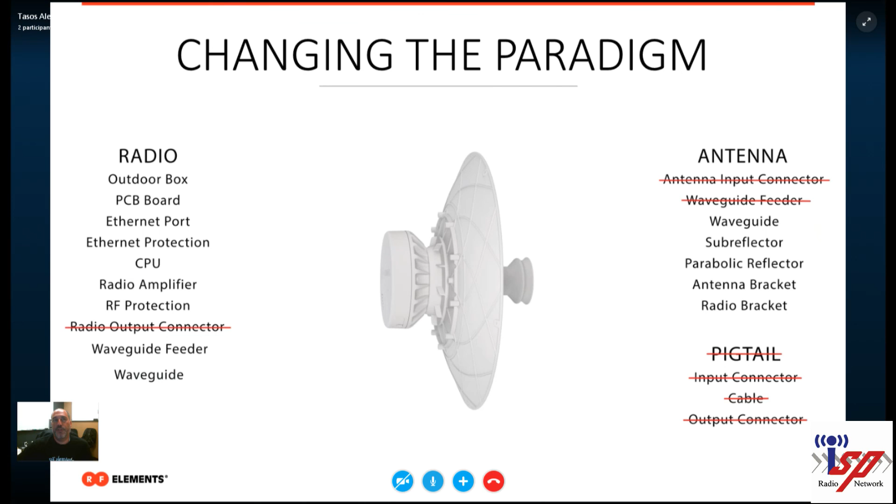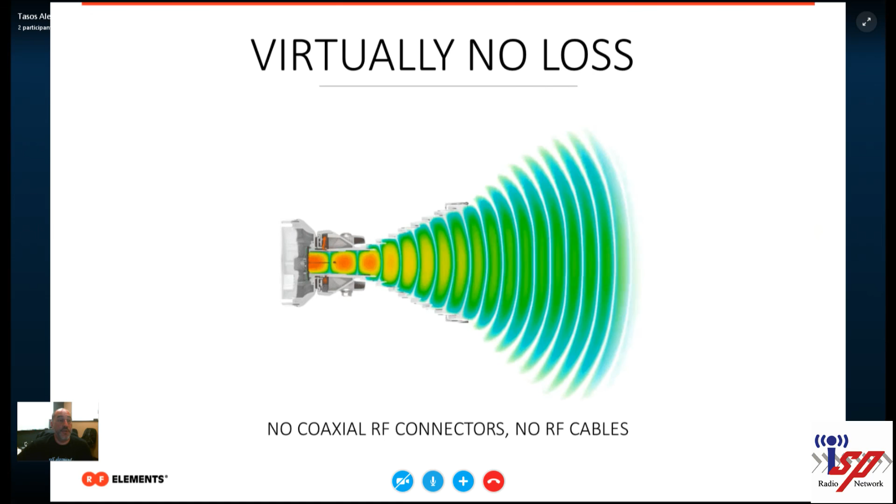So this is practically a zero loss system — one-handed installation, no tools, no taping, kind of what the TWISTPORT adapters do, but with absolute lower loss. We get virtually no loss in this type of future radio system we're working on, and we see the industry has to go this way. Combining them with waveguide fed symmetrical horn antennas or parabolic dish antennas, you can eliminate coaxial RF connectors and cables and basically have a virtually lossless system. The performance enhancement of just this type of radio system is about 3 dB, which is huge as far as link budget goes. It's definitely going to change the way antenna and radio technology is in the future, and we foresee other vendors following this path.